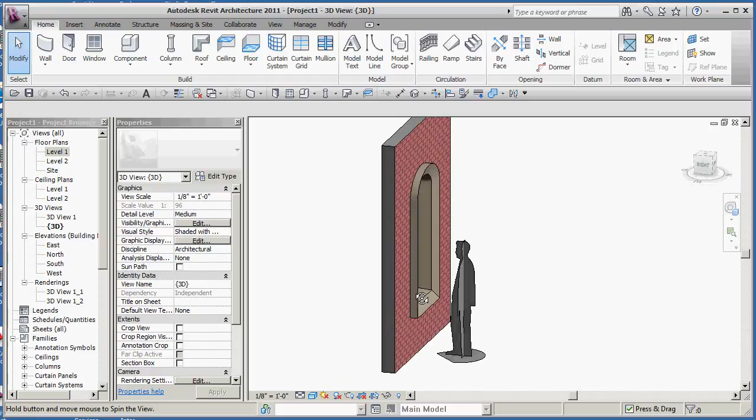In this little introduction lesson, we're just going to show you what we end up creating here. We just have a wall, we've painted it with brick, we've inserted Alex over here for our rendering, and then we've added an in-place family which is wrapped around an opening.

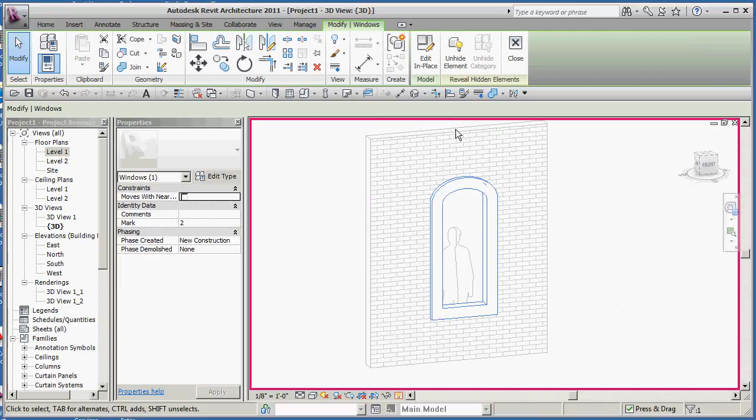If I click on the actual in-place family here and use my hide element, you can see that there's the opening which we load, and we learn how to change this from an elliptical shape to a rounded arch shape. And then we create an in-place family here, this guy over here, and put that around it.

And then we add a material to that object. So if I click on here and take this in-place family and say edit in-place family, it's a sweep.

And if I pick on here and say edit the sweep, click out, we have a profile, which we can go in and say edit the profile.

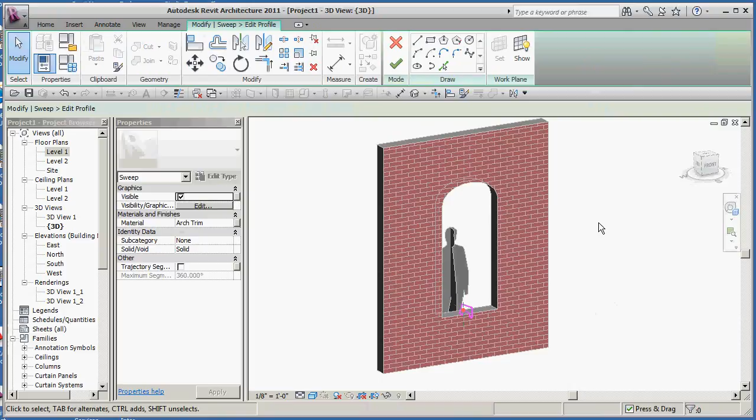There's our profile, okay? Or I can say pick the path, and then you can see there's the path that we used. So we have a path and we have a profile that we use to create that sweep, and you can see it's just a closed polygon.

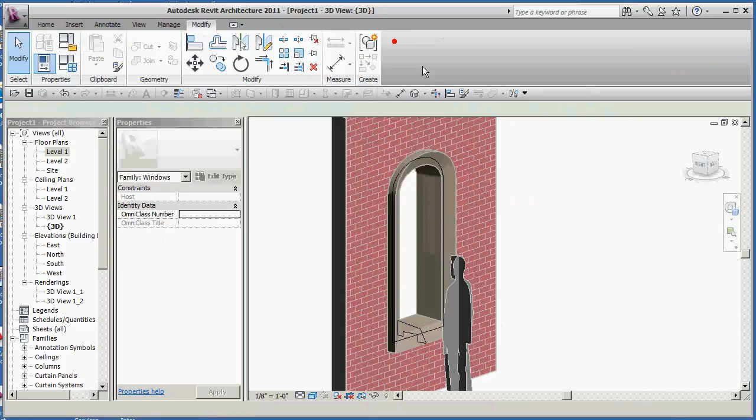This is the profile here, and there's the path going around that opening, and I'm just going to cancel out here. And then we've gone in and added a material to that sweep.

I'm going to cancel out again, and then what we've done is we've gone into our camera option and created a perspective view just like this.

And then we show you how to go in and do a rendering, and we play a little bit with materials, etc., by creating a little rendering that looks like that from in there.

And then we can export and adjust the different image intensity and contrasts from within our render dialog box.

So that's what we're going to do in this particular series. Load in the arched opening, play with that and look at its parameters, then put a sweep around it, add a material, do some rendering, drop in our background image there as well, or I should say using the

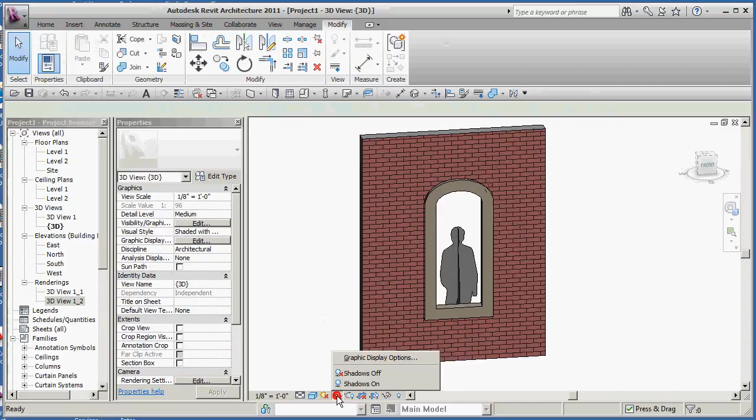what is called - just cancel on that - adding in something called a gradient background. So gradient background in the background, everything, so we get that nice effect just like that.